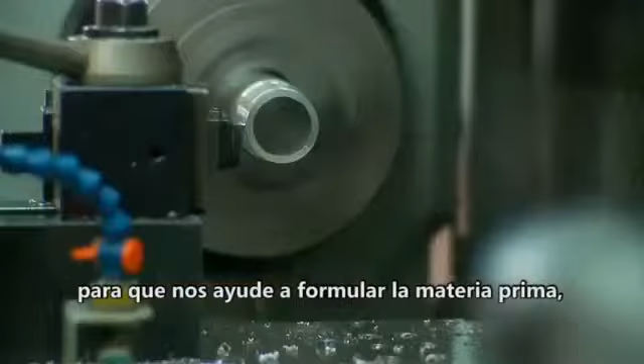The path of being a trailblazer is more difficult regardless of the product. If it's a product that's replacing something of legacy, it's even more difficult. It's not like we can call the company that's been making pistons for 100 years and they can help us with the formulation of raw material and the methodology and the heat treating and all the small refinements that they've done over the last 50 years and ask them, how can we apply that to batteries?

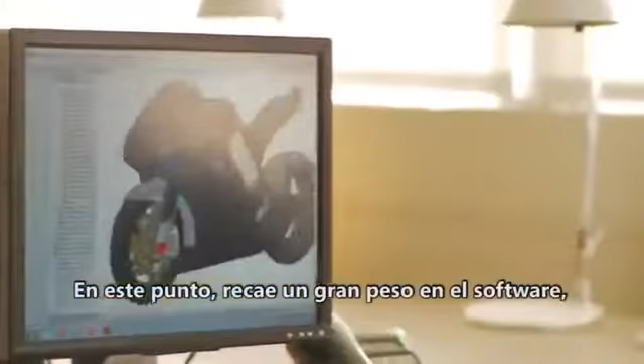It doesn't apply. At that point, there's a heavy burden on the software, SolidWorks in our case. It's still important to have some craftsmanship, some handwork. That's part of the process.

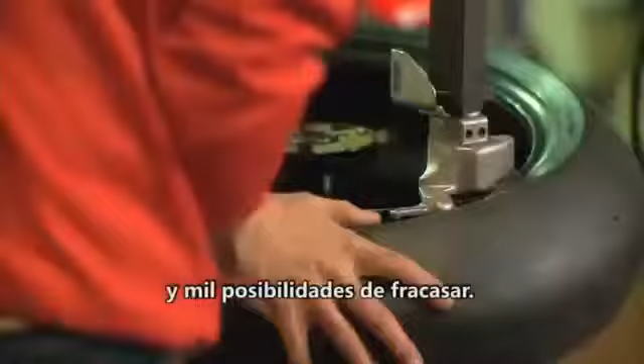To me, that's the real art. That's really what we're striving to do, is to keep the hand part engaged but make it transparent to the overall CAD process. There's hundreds and hundreds of parts, and there's thousands of opportunities of failure, and one failure is unacceptable.

We have a bit of an audacity. We dream big, think big, and want to take the big step. You need the tools of the powerful modeling programs like SolidWorks to do that.

Michael came to us and said, listen, we're overweight on the bike. If we're going to win the Isle of Man, we need to get the weight out. We started looking at the big chunks. One of the biggest areas on the bike is the swing arm.

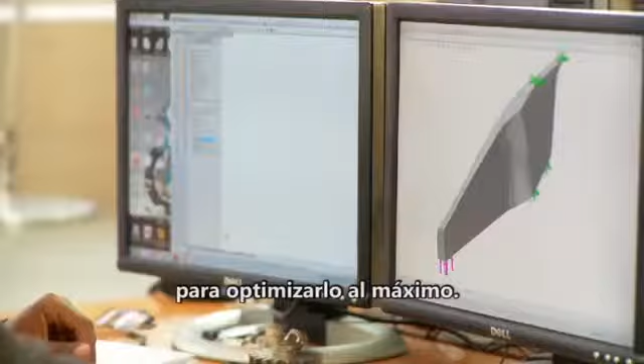We began using the finite element software to really optimize that. We applied loads and constraints to the model. All those dark areas, that's where we needed to remove the meat. So we went in and started carving away. We got 12 pounds out of it and increased the performance of the bike.

Michael approached me and said, I've been thinking about the suspension on the bike and I want to do something novel. I'd like to look into taking the springs and dampers and moving them up to where the tank would be on a normal motorcycle, because we don't have gas, so what are we going to put there, right? So we talked about putting the suspension up there.

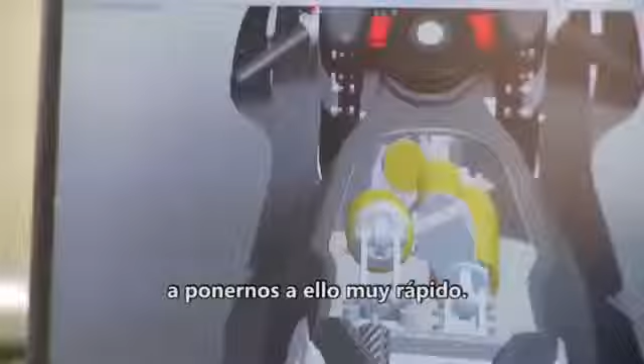The SolidWorks software really helped us approach it very quickly. We started with just basic sketches, figuring out, can we get the geometry to work? Can we get the forces to work?

Our bike development time was 4 months. There's no way we could have done it without the tools that SolidWorks brought to the table. There's just no way.

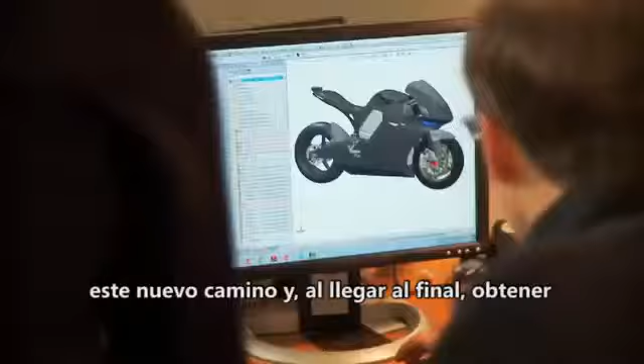SolidWorks has allowed us to basically go down this clean sheet path and come out on the other side of it with a bike that literally goes together first try, which is amazing.

The last 2 years, we had virtually no testing, and the bikes never saw the light of day until they were taken out of the crates on the Isle of Man.

I think it's a testament to the ability of our team in using tools like SolidWorks that we can actually have that much faith in parts that have never been tested, hand them to a rider and say, go ahead and take on the most challenging and dangerous course in the world.

Last year we won the Isle of Man for the second time, and before MotoCzysz won the Isle of Man, the last American bike to win at the Isle of Man was an Indian in 1911.

To stand there and see your bike come up the road that some of the greatest racers in history have come up, and cross that finish line, to recognize it as your bike and your rider, it's overwhelming. It's not to the same degree as having a birth, but it's really close.